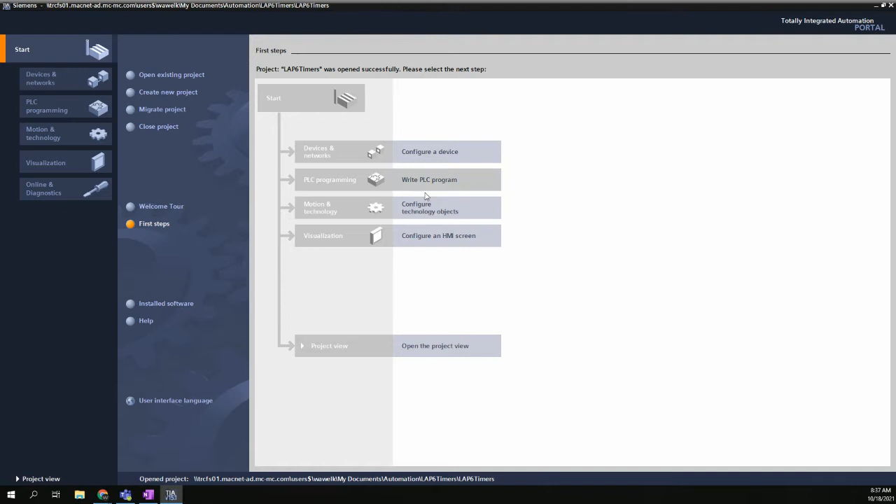And if you recall, our next step will be we have to add the device for the project. All right, that finally came up. So we need to configure a device, and we will choose Add New Device.

And we'll get an option here. We want to choose the S7-1200. And we highlight, or we expand that, and we expand CPUs. And as we learned the other night in our first lab, we are using the 1214C, the DC, DC, DC. And we'll expand that option.

That gives us 3 additional selections here. Just remember that each station has a label that tells you what model you have, so it's very important to choose the right model. If you don't, then you might have to restart from scratch.

You can change your device in the project, but it might wipe out your logic. So you want to make sure that if you have the AG31 or the AG40 station, no stations are AE, so they'll all either be the AG31 or AG40. Choose accordingly. I'll choose the 31 this time.

We'll get a choice for the model, it's listed, and then a choice for the version. In this case, there's no other version but 3.0. And we'll hit Add.

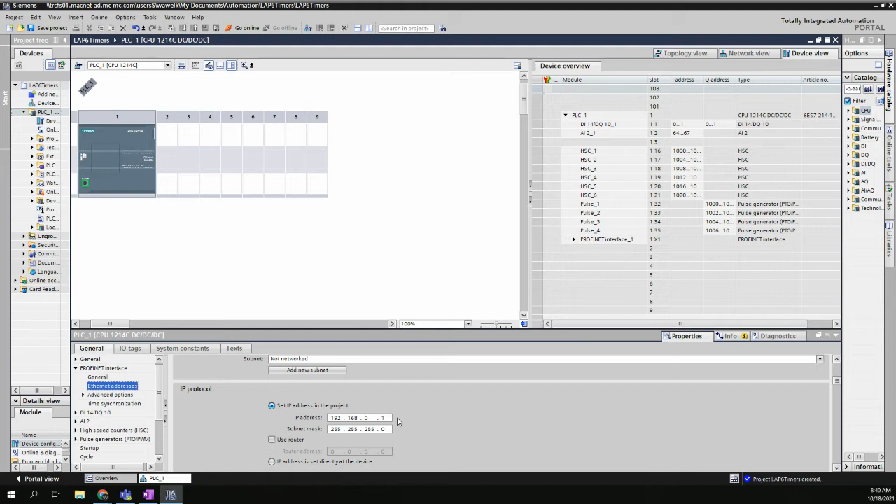The IP address, when you create a new project, is given by default as 192.168.0.1. Our stations are all kind of set for a different IP address. So if you don't change this IP address, it will overwrite the IP address in your PLC, and that is not a problem if that happens.

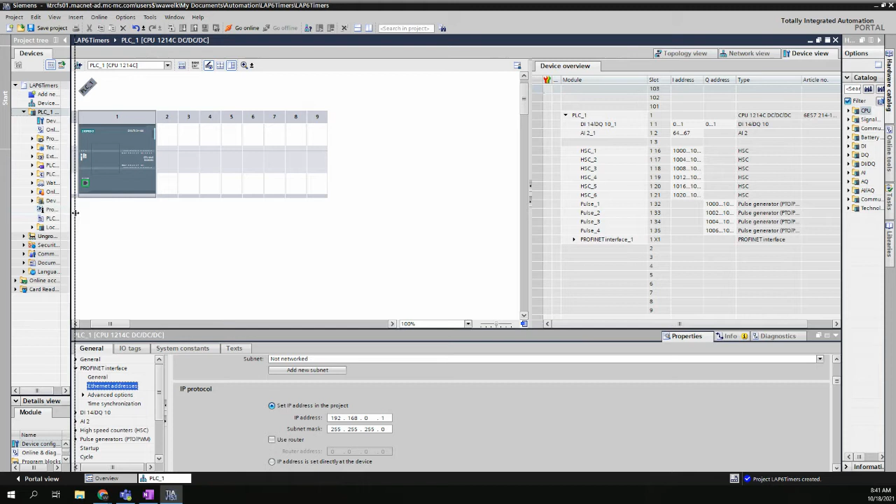But we want to try to keep it matching what's in the PLC that's already there. Again, there's a label on the PLC that tells you what your IP address is. But if you don't set it, it's okay, we'll still know the address to get connected to it.

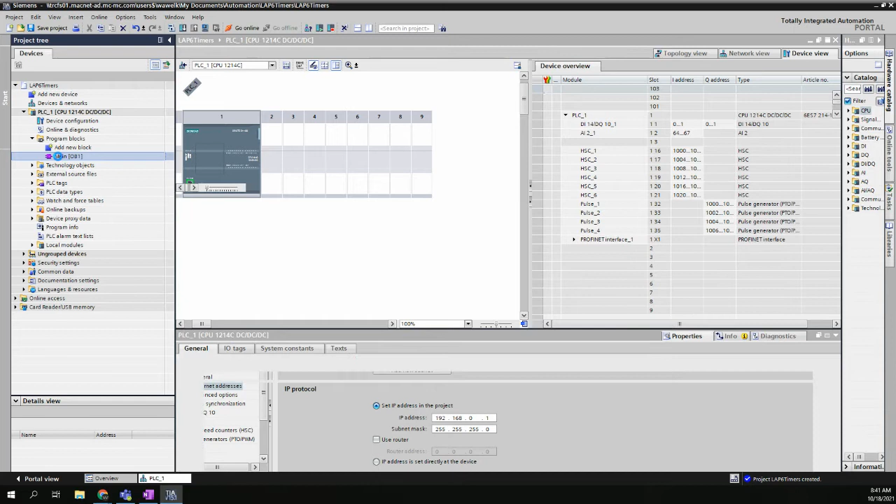So our next step in the lab, in skill 1, is an on delay timer. We'll go to program blocks and come to the main OB1, double click on main, and that will open up the logic editor, which allows me to enter my logic on the rungs. So network 1, that stands for basically rung 1.

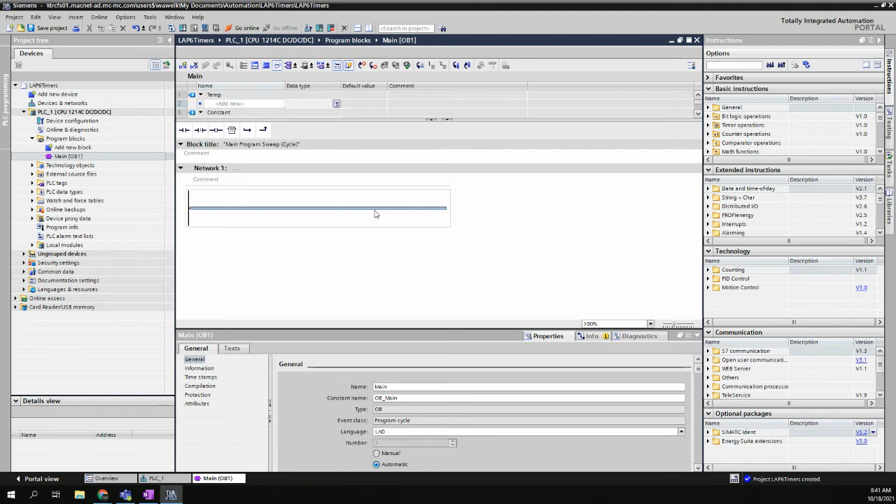What's going to happen in the Lab 6 labs is you're basically going to create a simple ladder that will have a timer - an on delay timer for skill 1, skill 2 is the off delay timer, and skill 3 is the retentive timer.

One thing we have to have is the ability to trigger the timer. So we will add a normally open contact and tie it to the first push button in the station, using %I 0.0. That will link that contact to the very first push button, which happens to be the green push button on the training station.

Then we need to add the timer. At the moment, we just have these very basic elements to choose from. We can come over into the instructions, and you can see that we can expand on more instructions - Basic, Extended, Technology - Siemens organizes them into different buckets.

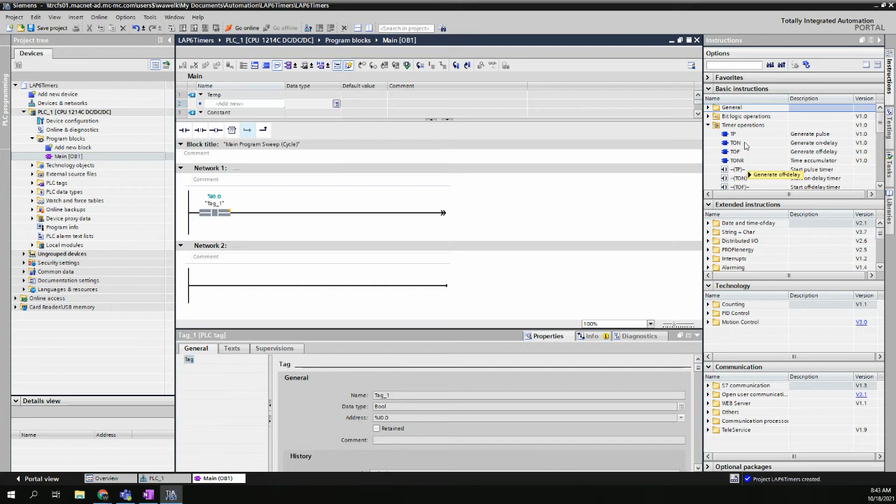For basic instructions, we have timer operations near the top of the list, luckily. So we can expand that, and we see we have TON, TOF, and TONR. These will be the 3 timers that you'll be playing with in skills 1, 2, and 3.

We're going to grab TON, which is an on delay timer. We'll highlight it, select it, and drag it to the rung. What happens now is we get this window pop up called call options.

If we recall from our Siemens S7-1200 introduction presentation that we had online, it basically said there were a few different types of memory spaces, right? There's a %I table, %Q table, %M, and there was this other one called %DB for data block. So the timer is going to use that %DB memory space.

It doesn't really mean that we have to worry about that too much. The PLC will kind of sort that out on its own, but just know that it's going to store whatever memory requirements it needs - a little bit of working memory space for timers to work - it'll put in this %DB.

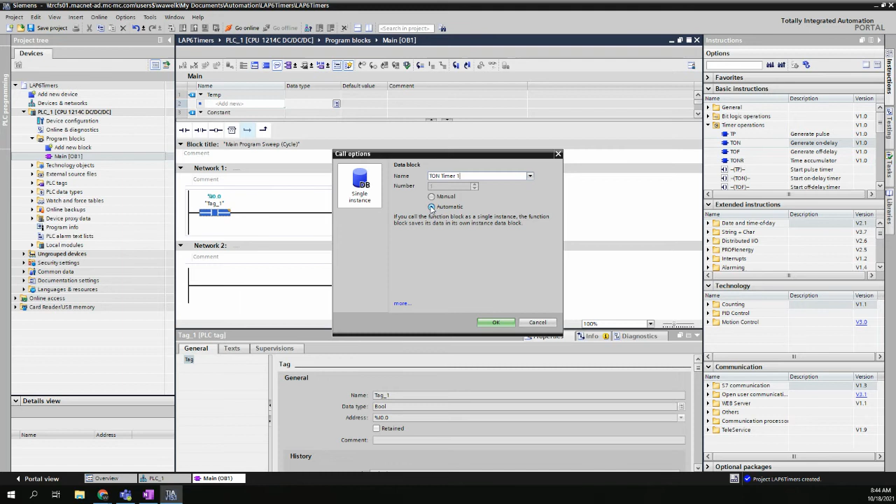So it's going to give it a name. We want to give this data block a name. By default, it says IEC_Timer_0_DB. I think the lab itself tells you to rename your timer to TON_timer_1. We'll leave this as automatic, and we'll hit OK.

So now we have a %DB1 that was created - that's our data block 1, and it is called TON_timer_1. There's only really 2 things to worry about here, or perhaps 3. There's the preset value, and there's the elapsed time, which again, we don't really have to do anything here - this is our elapsed time, but we can reference this in the program.

And then our Q, right? What are we going to do when the timer times out? So the last thing we'll do is add a coil towards the end of this rung. Let's just say we're going to turn on an output - we'll turn on the first output, which will be %Q 0.0.

So the very first light on the training station will turn on when this timer times out. So come back to the timer - we do have to give it the preset time value.

So let's just see what happens here. We're going to say it's a 10-second timer - I believe the lab calls for a 10-second timer. If I just type in 10 and hit enter, you'll see that we get a similar structure to what happened with the Micro820s. We get T, then a hashtag or pound symbol, and then a 10, but it chose MS for milliseconds.

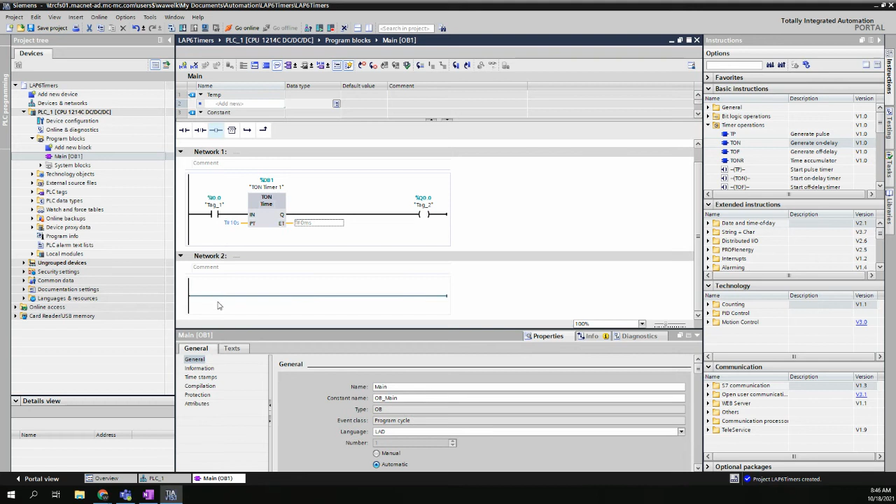And then there's another rung that basically shows what it's like when it's off, just to show you how the timer works. So very straightforward. Once you do that, you can download the program and test it out.

Skill 2 is to make this basically an off delay timer. Now, the way the book is written, it always says shut down the station and come back in with a new lab. You don't have to do that when you're jumping from skill 1 to skill 2 to skill 3. If you want a real shortcut method, double click on this block and you'll find that we can just change it to TOF right on the spot. Our DB stayed DB1 and our timer name stayed TON for timer on delay, timer 1. You could probably change that if we want. Perhaps, maybe not. It's okay for purposes of just testing in the lab that this doesn't match up.

But now this will act the exact opposite. The first time, when it was TON, when I pressed and held the input down, the timer would start timing up to 10 seconds, and after holding it for 10 seconds, the output would turn on. In this case, it'll be the exact opposite. When I press the button, this will turn on instantly. And when I let off the button, this will start counting down from 10. This will stay on even when I took my finger off the button. And once this timer times down from 10 seconds, then this turns off. So that's the off delay timer.

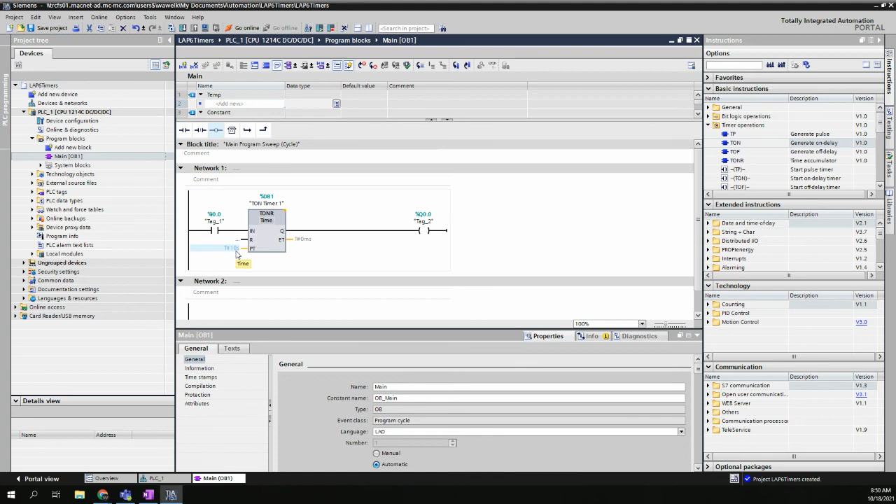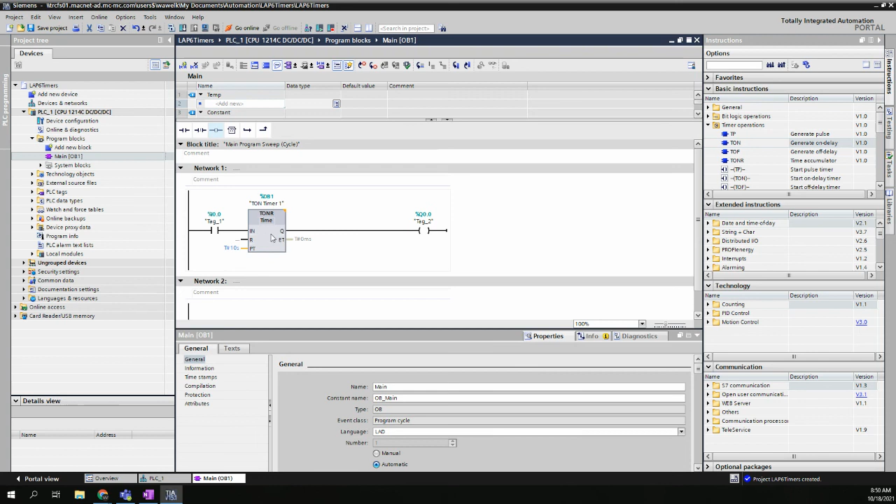One other additional pin you see here on the block is an R, and R stands for reset. So if there was a particular reason why you wanted to reset the counter or the timer before — let's say you held it down for 3 seconds and then let your finger off, and let's say you did want to reset the timer to start back at 0 — then you can trigger the reset, send a reset signal to it. That will clear the block back to 0, and then when you press the on button again, it'll start counting from 0. So only if you trigger the reset would that happen. You probably don't have to wire anything to the reset. That'll be one thing you'll find out when you work through the lab.

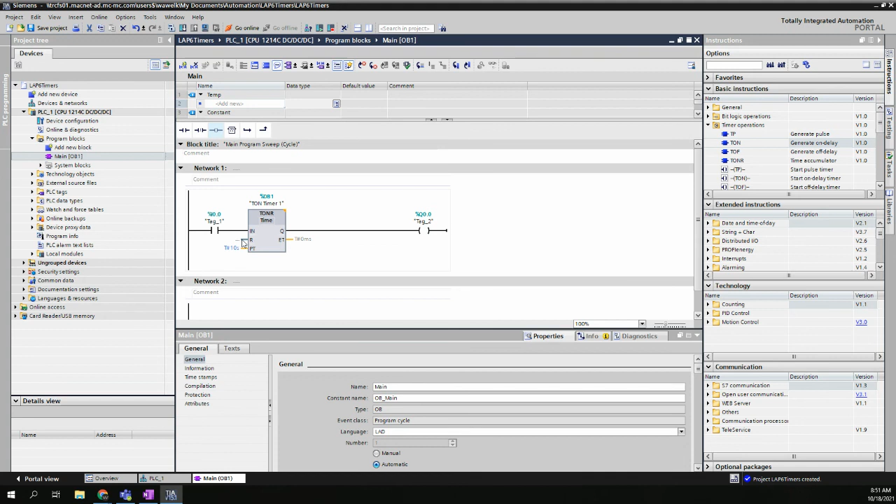All right, so that's basically the first half of lab 6. It's going to be skills 1, 2, and 3, working with the timers. Take your time, experiment with how the timers work, and just get a good feel for how they behave before you move on to the counters.